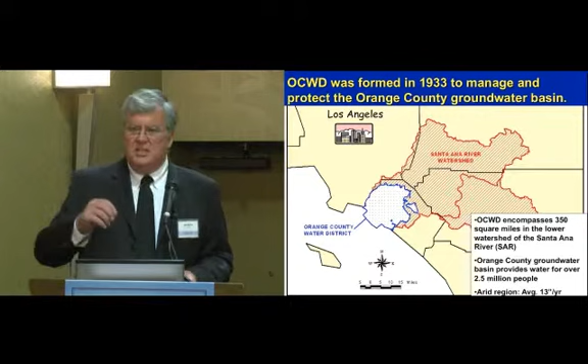However, the wastewater is high in nutrients and the stormwater is high in TSS. As a result, our basins have a tendency of clogging, so we have to drain them periodically, dry them out, and mechanically clean them in order to restore the recharge rates. So we're looking at ways to desilt that river water so it can percolate at a more sustainable rate.

We currently inject anywhere between 20 million gallons to 35 million gallons into that recharge barrier. In the future, we are developing a project called mid-basin injection, where we would take the highly purified GWRS water and inject it into the middle of our basin where there's a clay layer near the surface. So we'd pop a hole through the clay layer, inject the GWRS water, and put it in a place where the basin has a very large overdraft.

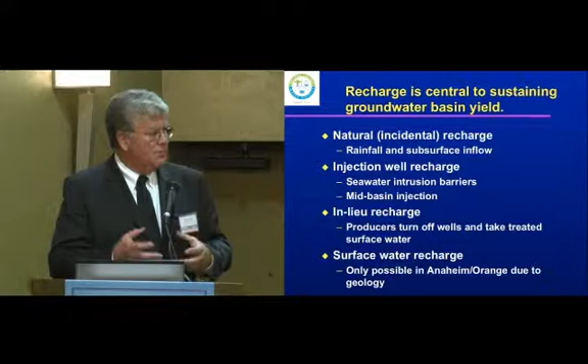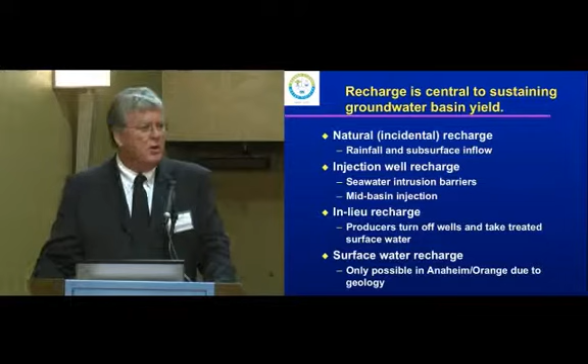There's kind of a pumping depression in that area. By injecting the water mid-basin, we'll hopefully be able to fill that up a little bit to take care of the groundwater levels there. There's also in-lieu recharge, which happens when we purchase treated water from Metropolitan and then turn our pumps off—a means of artificially keeping the groundwater level high by purchasing water from Metropolitan.

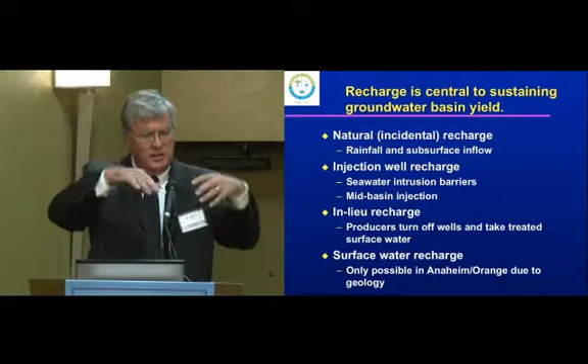Surface water recharge is only possible in the Anaheim and Orange areas due to the geology there. The sands and gravels come up near the surface, so you just have to dig a little hole, and you're connected directly down into the groundwater basin.

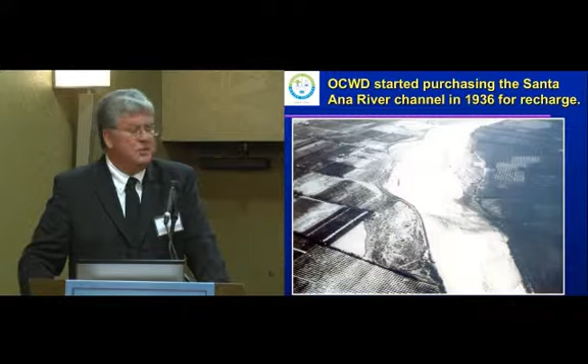This shows a very old picture of our recharge areas. If you look closely, you can actually see orange trees. I don't know whether there's any orange trees left in Orange County, maybe a couple groves in Irvine. But that shows the Santa Ana River in its natural condition before it was channelized and before the construction of Prado Dam.

You can see how subsequently over the years we've added on to those basins: 63 to 68, the Warner Basin, followed by a bunch of off-stream basins, our off-river system, and then Kraemer Basin. In 83 through 85, we purchased this very large recharge basin, which has a storage capacity of about 12,000 acre feet. We also built a pipeline from the bottom end of the river at Ball Road over to that recharge basin.

Most recently, we've acquired a basin just last year and put it into operation, Miraloma Basin. So we really have purchased a lot of property over the years for recharge basins.

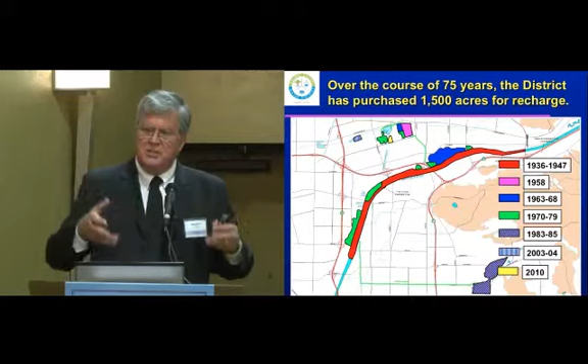As a result, we've increased the yield out of the basin tremendously, so we're able to allow our pumpers to pump quite a bit of additional water. And of course, as people came in the 40s, 50s, and 60s, pumping demands increased, so we had to increase the yield of the basin.

The surface recharge basins provide about two-thirds of the groundwater basin recharge over the last 5 years. This is a 5-year basis. You can see in the pie chart, 67% of the water that is recharged is in those basins that we showed on the previous slide.

Those basins are used to capture Santa Ana River flows, to capture stormwater flows, and also recently, over the last 5 years, we've been pumping GWRS water to those recharge basins. So there are basically 3 types of water introduced to those recharge basins, making up two-thirds of the pie.

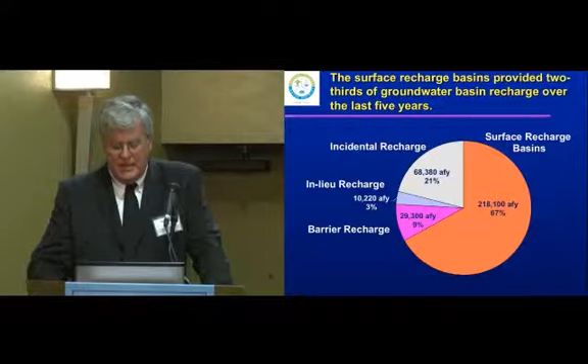Incidental recharge, as I mentioned before, is about 21%. In lieu recharge is 3%, and barrier recharge is about 9% of the water that goes into the ground. So that big piece of the pie, those basins, are very important, and it becomes important to keep them percolating at as high a rate as possible.

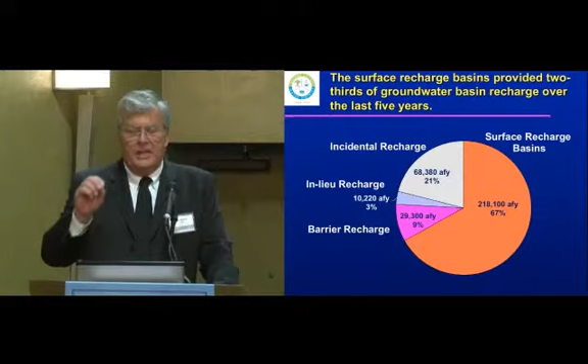Enhancing and expanding the surface recharge system has the greatest potential to increase recharge. Future expansion of the seawater barrier, we think we can get anywhere between 3,500 and 9,000 acre feet per year. Mid-basin injection, we're looking at about 2,500 acre feet per year per well site. In lieu recharge is kind of being phased out by Met, so that probably won't be as big a part of our recharge portfolio moving forward.

Surface recharge is a very cost-effective method. We can get up to 700 acre feet a year per acre with Santa Ana River flows, which are fairly heavily silt-laden, and up to 3,700 acre feet per year per acre with GWRS or Met water, which is ultra-pure drinking water. So that will perk very, very well.

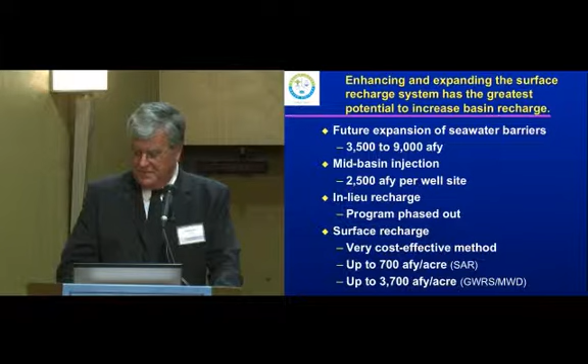Compared with Santa Ana River water, nearly 3 times as much GWRS or Met water can be recharged in Miller Basin. Miller Basin is a flood control basin, so it doesn't have real high sustainable perk rates because it's been used for flood control, and a lot of sediment has been dumped in it. Over the years, that sediment has compacted and gone down into the ground, so we don't see huge perk rates there.

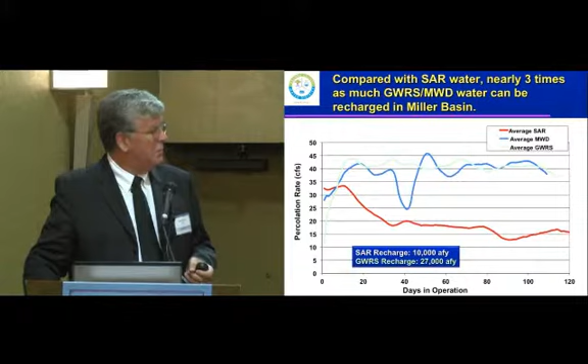It's very hard to see - we used the wrong color for GWRS water, but it's actually graphing right up here at about 40 CFS average, with Met water about the same, though it's a little jumpy because they turned off deliveries for a while. You can see Santa Ana River water does have a decay, dying off from about 35, 34 CFS down to 20, and then declining considerably after that. Once it gets to a certain level, we'll jump in, take the basin out of service, and clean it to restore its percolative capacity so it can come back up to the original rates.

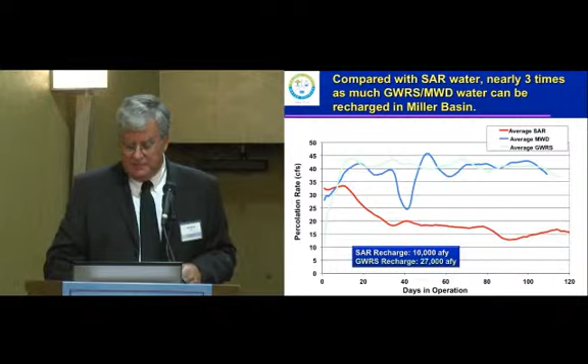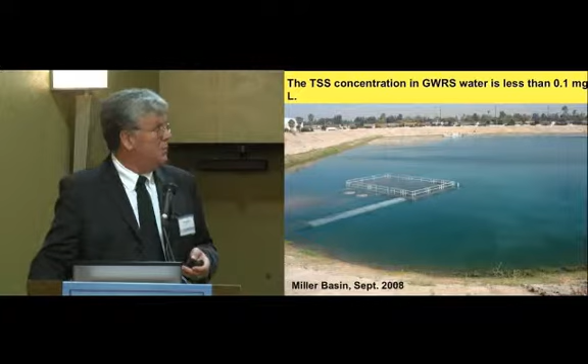This shows what Miller Basin looks like with GWRS water. It's not quite as dramatic, but it really looks like a South Pacific island down there. The water is very clear, you can see down to the bottom, including the check valves submerged underneath. The TSS concentration in GWRS water is less than 0.1 milligram per liter, so extremely low.

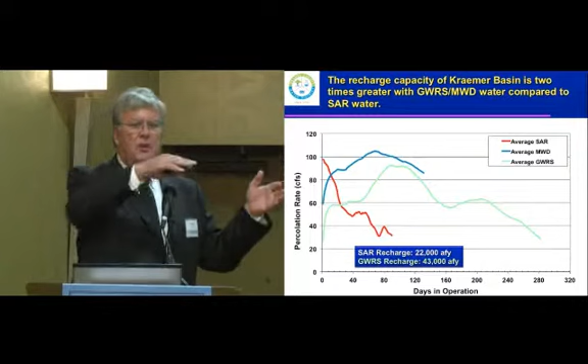Recharge capacity of a different basin. This is Kraemer Basin. It has historically taken a lot of river water, but it's at the end of the system, so a lot of sediment has fallen out along the way. It has very high sustainable recharge rates when cleaned and when using clean water.

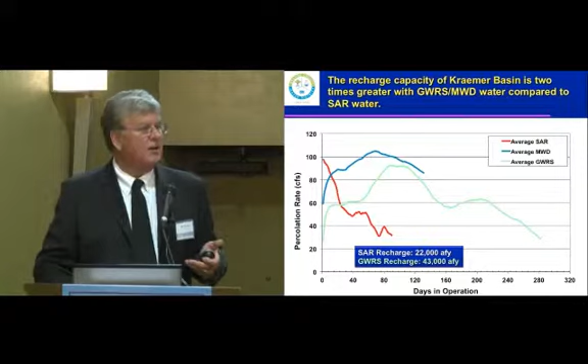With met water, we were taking a lot of water all at once, and it got up to 100, then it starts dying off a little bit. GWRS water shows the same thing with an extended decay. Santa Ana River water shows a very steep die-off. So we can see the benefits of having that GWRS water and cleaner water in those basins, allowing higher and more sustainable percolation rates.

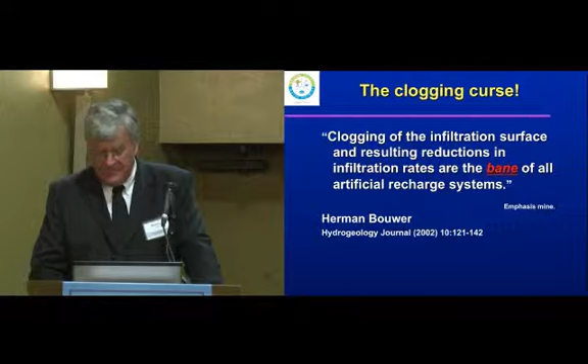Clogging is the curse. Clogging of the infiltration surface and resulting reductions in infiltration rates are the bane of all artificial recharge - that was a comment made by Herman Bouwer. And it's true. Clogging is a key constraint in maximizing the capacity of the existing system, and research has shown that suspended sediment is the primary cause of clogging. OCWD actually developed an empirical formula that confirms this.

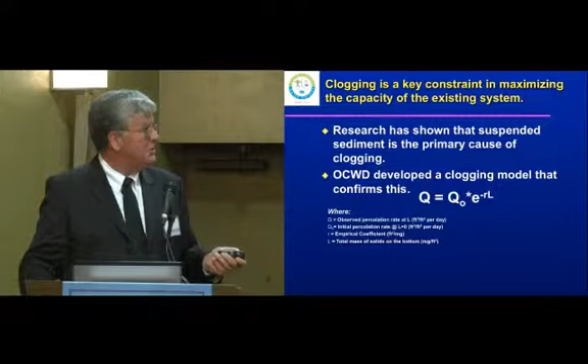The two terms to pay attention to are the flow at time zero, or Q naught, and L, which is the total mass of solids. So in essence, this equation says that over time, the mass will decrease the amount of Q into the basin. This shows how we arrived at that empirical formula.

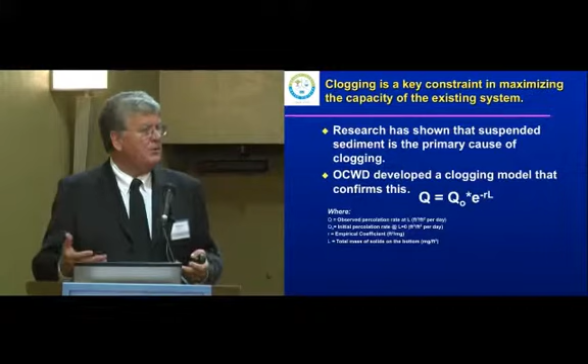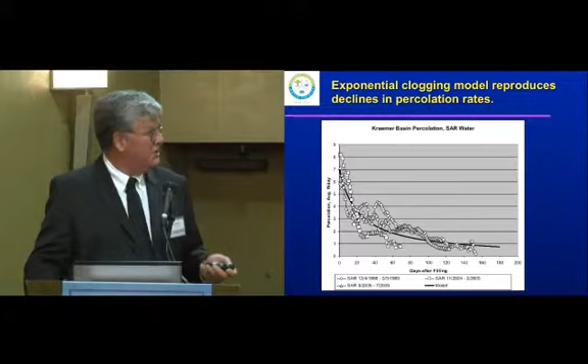We took data over 3 years at different times of the year of percolation of Santa Ana River water - again, this highly silt-laden water - and put the best fit curve in there to come up with the equation. We have these decay curves for each one of our basins, so it's a very good predictive model for us to know when we may be able to get in or have to clean basins.

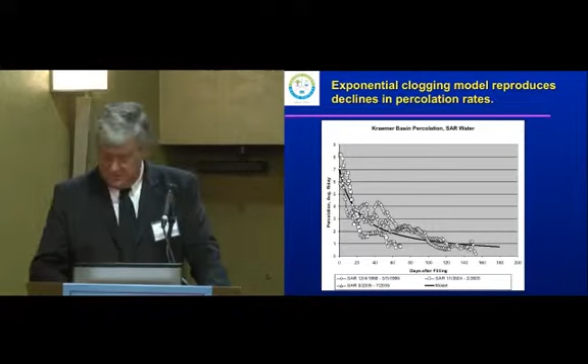About 5 years ago, we went to our board and said we think we ought to take a look and research different methodologies that could help restore percolation or take the sediment out of the river water.

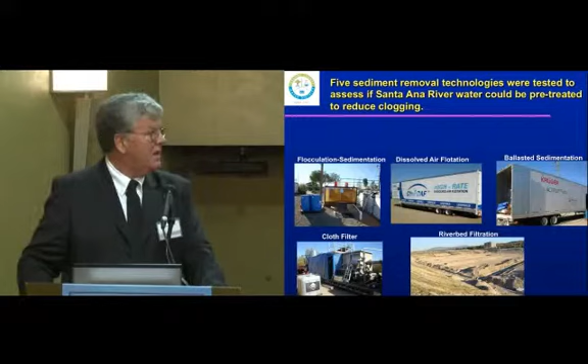We spent a million dollar study over the course of a year and came up originally with 5 technologies to test the effects on river water and how efficient these technologies would be at desilting it. They consisted of flocculation, sedimentation, dissolved air flotation, ballasted sedimentation, cloth filters, and riverbed filtration.

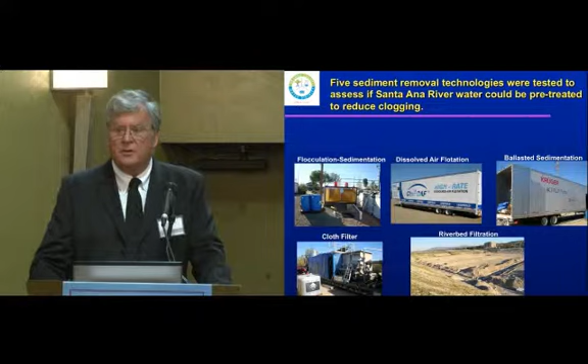After the year's study, we ruled 3 of them out as not being effective and came up with the final 2: the cloth filter and the riverbed filtration. So the recharge water sediment removal demonstration projects were both the riverbed filtration and the cloth filter.

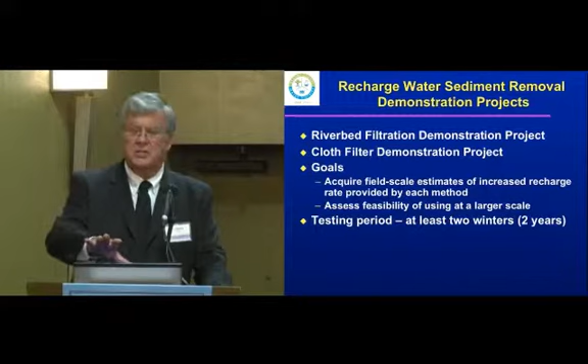Our goals are to acquire field-scale estimates of increased recharge rate provided by each method, assess the feasibility of using it at a larger scale, with a testing period of at least 2 years - it may be 3 or 4. We have to have enough data because there's such variability in flows and hydrology. We want to make sure we capture some of the worst case situations along with the best case situations before we do the evaluation and make a decision as to whether to move forward or not.

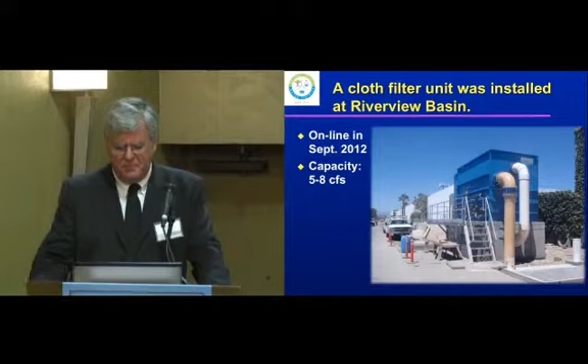A cloth filter unit was just recently installed at a smaller one of our basins, Riverview Basin. In fact, it just went online in September. It has a capacity of 5 to 8 CFS. The unit has 12 filter discs - similar technology, I think LADWP uses this in their water treatment facility up in the valley. The discs are cleaned by backwashing, can remove up to 90% of the suspended solids, and it's a unique application for what we're doing.

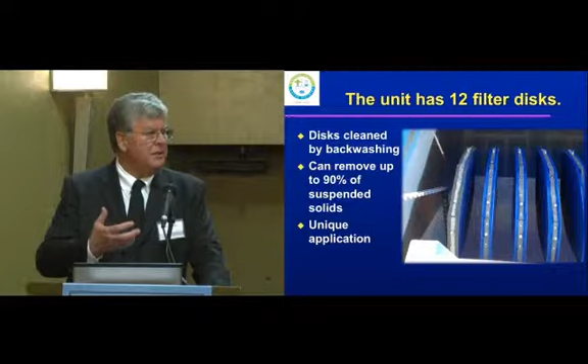We hopefully will get a lot of good data on this and be able to see whether it will help us out in the future. The riverbed filtration system takes advantage of natural filtration processes to remove suspended sediments in the water. What we've done here, in what we call our off river - immediately adjacent to the Santa Ana River - is excavate and put in some slotted PVC pipe. We're going to use that sand, in essence, to remove the silts.

The theory, if this works, if we put it in the river, is the silts will become more or less self-cleaning. So we don't have to remove or worry about silt removal or disposal. The river will do that for itself.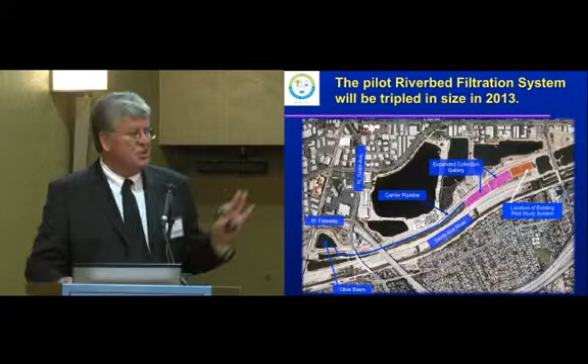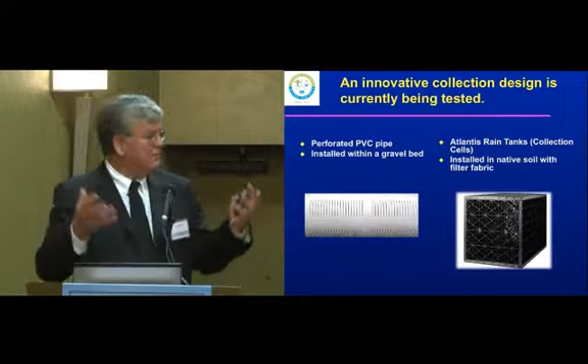This shows a picture of the PVC pipe. We're looking at two different things. Conventionally, slotted PVC pipe is used. We're also looking at these Atlantis rain tanks, or collection cells. We wrap it in filter cloth so the sand couldn't get inside. It has a lot of volume and surface area for the water to drain into and collect very high volumes of water. I don't know that this has really been explored before, so it'll be interesting to see how it turns out.

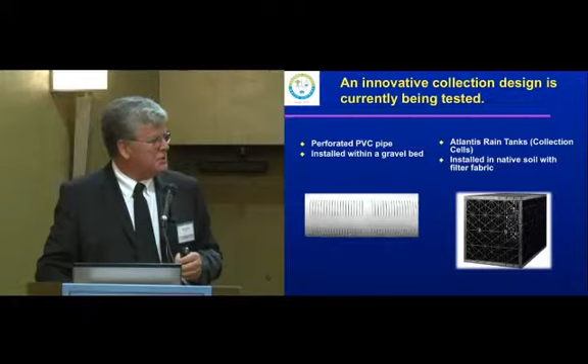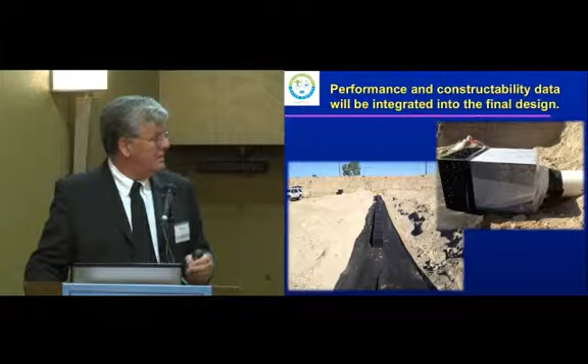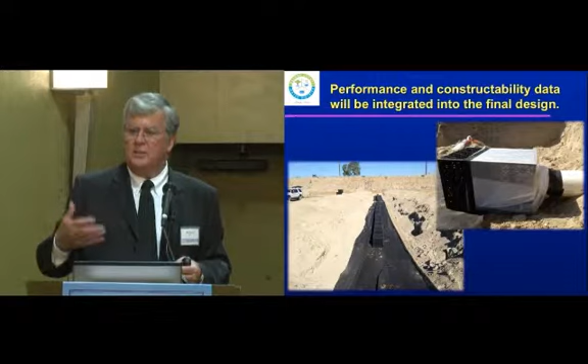You can see here where we've excavated in that same area. We have the filter cloth laying, crates on top of it, and then it transitions to a pipeline that will take that water down to this other basin, the Ball Road Basin. These projects really are demonstration projects, and we've told our board that, and they understand that. Hopefully we'll get results out of this, and hopefully it'll lead to more effective silt removal.

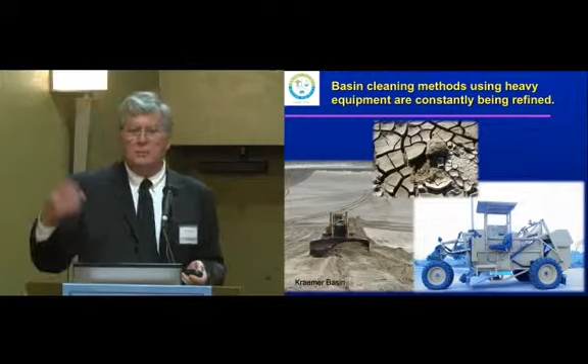We've maybe wised up a little bit. We went with this small beach cleaning device. It's got a little blade that skims the chips off and throws them into a hopper. That's a small-scale device for a smaller basin. Instead of using brute force and D8s, we're actually looking at paddle wheel scrapers now, a little 613 paddle wheel scraper, to pick those potato chips off the bottom and store them on top.

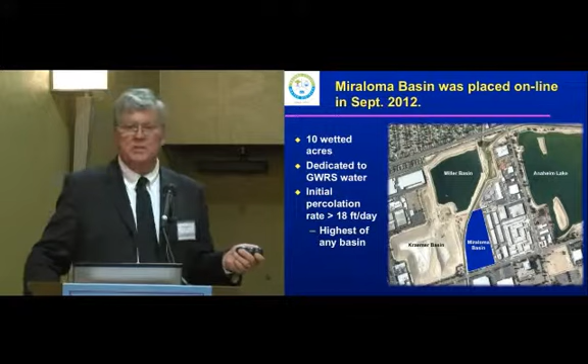Miraloma Basin is our most recent basin right down here. Here's Anaheim Lake, Miller Basin, and Kraemer Basin is empty at this time. Miraloma has 10 wetted acres and is dedicated to GWRS water, that highly purified water. There's never been any Santa Ana River water in here. As a result, we expect extremely high percolation rates, and we've seen them. We just started utilizing it.

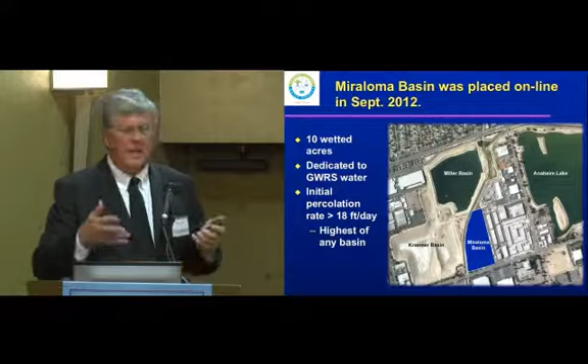We're putting GWRS water up there, 50 million gallons a day into that basin, and we cannot wet the bottom of the basin. We're getting such high sustainable percolation rates, about 18 feet a day, 50 million gallons, 75 CFS. It really is working out outstandingly. It'll also enable us to continue operating GWRS during the winter, year round, instead of having to shut it down when we'd capture some storm flow. That's an outstanding example of what a new basin can do.

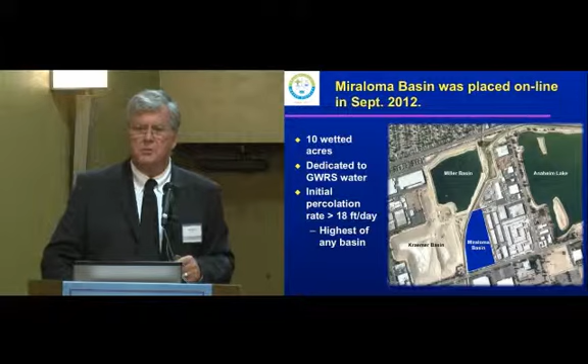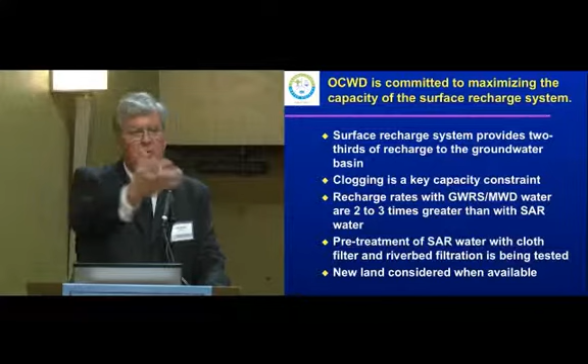In fact, we're in the market for purchasing more property in the city of Anaheim right now as we speak. OCWD is committed to maximizing the capacity of the surface water recharge system, which provides two-thirds of the recharge of the groundwater basin, so it's a significant chunk. If we can solve the silt problem, it'll really open up the ability for us to capture more stormwater. If we can desilt the stormwater before it hits a basin, we'll be able to increase the overall percolative capacity of our system. Clogging is the key constraint.

Recharge with GWRS or MET water is 2 to 3 times greater than Santa Ana River water, so we have this blend of water. Pre-treatment of the Santa Ana River water with cloth and river bed filtration is being tested. And new land, as I mentioned, must be considered when available.